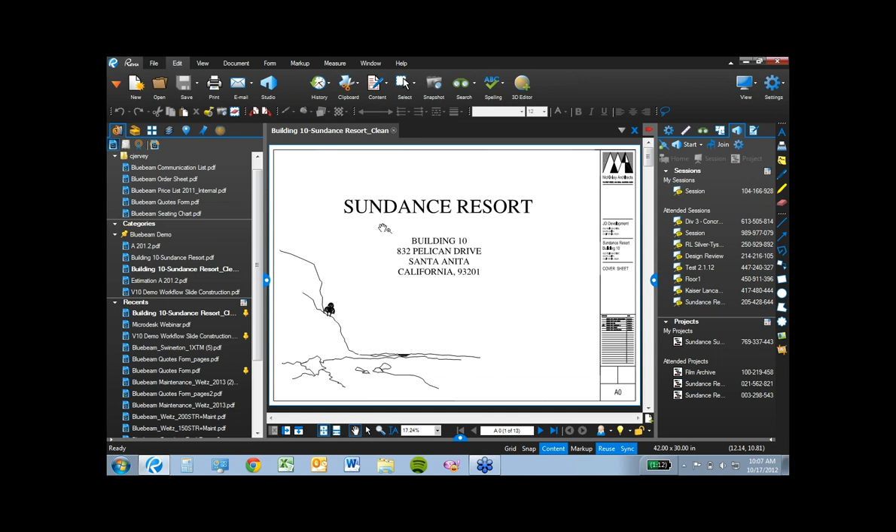So I'm going to go ahead and start by pulling up a set of plans here. You'll notice if I scroll to our page index, our drawing index, that we've already started to create some hyperlinks. We wanted to make a dynamic project document, something that's easy to navigate, that we could set up beforehand and would save lots of time throughout the course of the project.

You'll notice we've got a new Links tab in Revu 10, broken down into two areas. An area for places, which allows you to create linked destinations, so you'll notice we've already got a couple of details linked, and I'll show you how to create that in a minute. We also have a full list of all the hyperlinks in the document in our hyperlinks area, which we could search for any given link, etc.

You'll notice we've got a whole bunch of these from this particular sheet that are jumping to the pages we want them to jump to. When I actually turn on the hyperlink tool, you're going to be able to see where those areas are. So we actually started this process here.

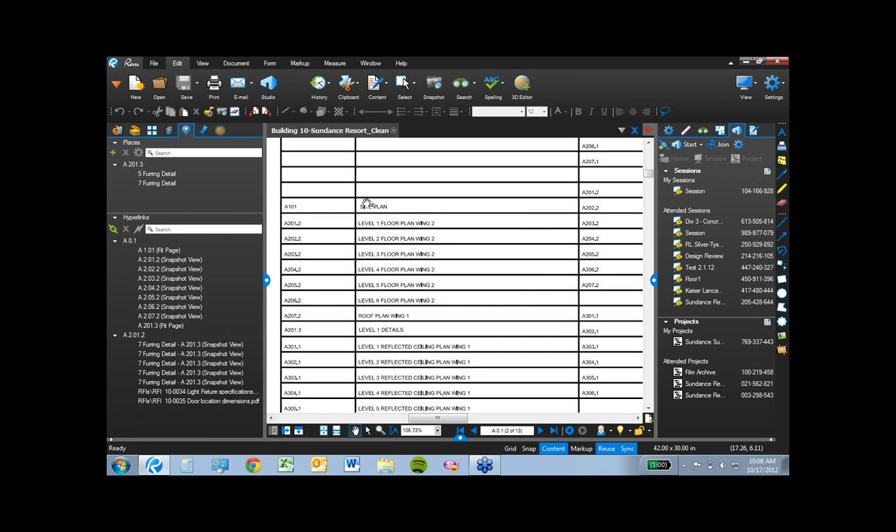So now I'm going to show you how easy it is now that this has been created. I could jump to Level 1 floor plan, and you'll notice it takes me right there. Again, this is just about making your documents much more navigable and easy to get through.

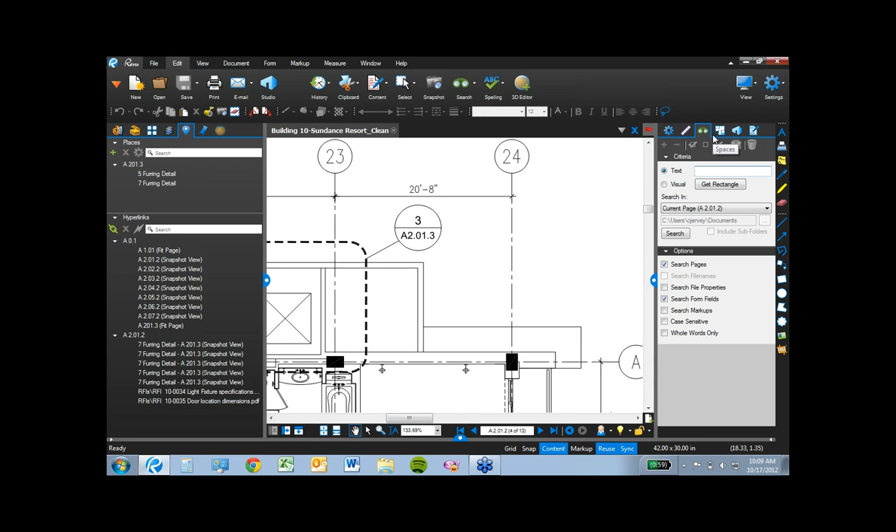But we also have a couple other tools that we've built out that can make this process even better. You'll notice we have a Search tab here in Revu. One of the new tools we have is this visual search tool. So I might also use the links tools to jump not just from a page index to a floor plan, but also from a call-out to a detail. Again, you could set all this up before your project got started to really make this process dynamic.

So once I've clicked on my Search tab, I can click on the visual search button and click on the get rectangle button, and it turns my cursor into a crosshair. I'm able to go ahead and define that space here, define the area I wanted to search. You'll notice I get a nice little preview here in my search tab.

You'll also notice I have the ability to search a variety of different areas. I can search the existing document, search this current page that I'm on, or I could go ahead and search all open documents. I could search through an entire folder — so if I've got my project broken up so each page is its own file, you could store them all in a folder and have the search run through the entire folder for that particular graphic.

In the interest of time, I'm just going to run it on this page, and I'm going to click search, and it'll run through. You can notice it's powering through here, and it found the two locations on this drawing that have that particular call-out.

So I'm going to go up to my tools here, check all, then go to my check tool, and I'm going to go ahead and hyperlink all of these results. You'll notice that when I create a brand new hyperlink, or when I hyperlink all, you get this action dialog box. The action dialog box allows me to create various different types of links.

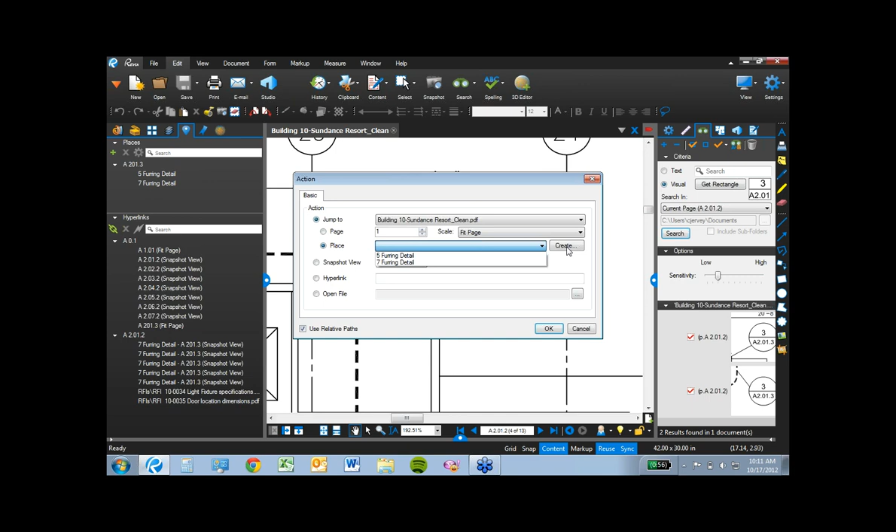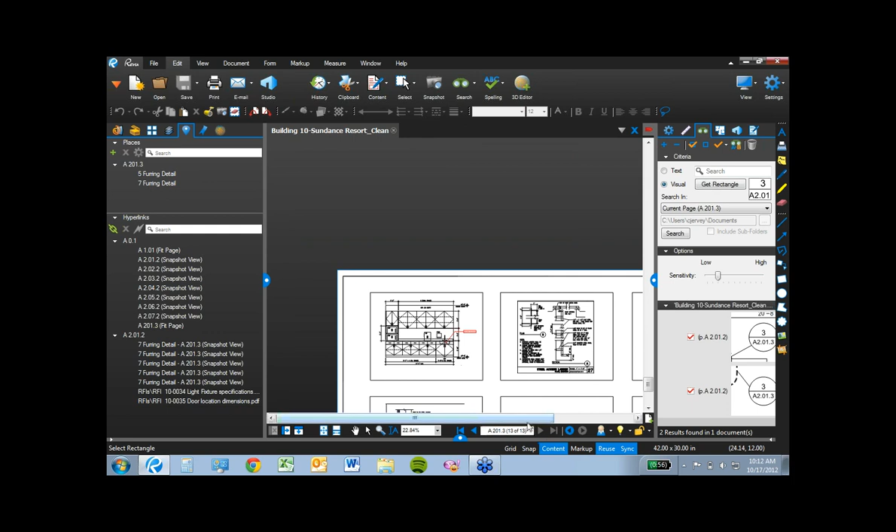You'll notice that I have the ability to name it, and in this case I'm going to say this goes to my elevator detail, because I already know that. I'm not going to jump to a page here, I'm going to do that snapshot view. I'm going to get the rectangle, and I know that this is on my last page, so I'm going to scroll out here.

I know that's my elevator detail, so I'm just going to quickly draw that around the detail. You'll see that it loads the actual location, gives me the file name and the page, etc. So now I know I've created this brand new place. When I hit OK, you'll notice that it loads in my New Places area.

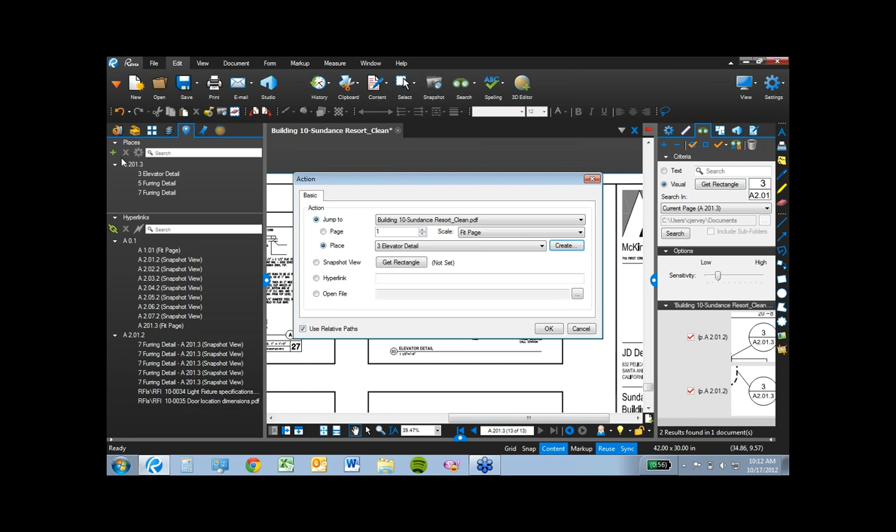If I jump back to page 4 here, which is where those original callouts were found, you'll notice that these are now hyperlinked, and when I click on them, it takes me right to the elevator detail. So again, using the hyperlinks tools, you could use them for a wide variety of different things, but one of those ways is creating easy to access project documentation where you can very quickly jump.

No longer do you have to unfold your 400 sheet set and try to find a detail on page 87 that's somewhere on a sheet of 40 different details. So that should make your life a lot easier. And again, you can use that for almost anything.

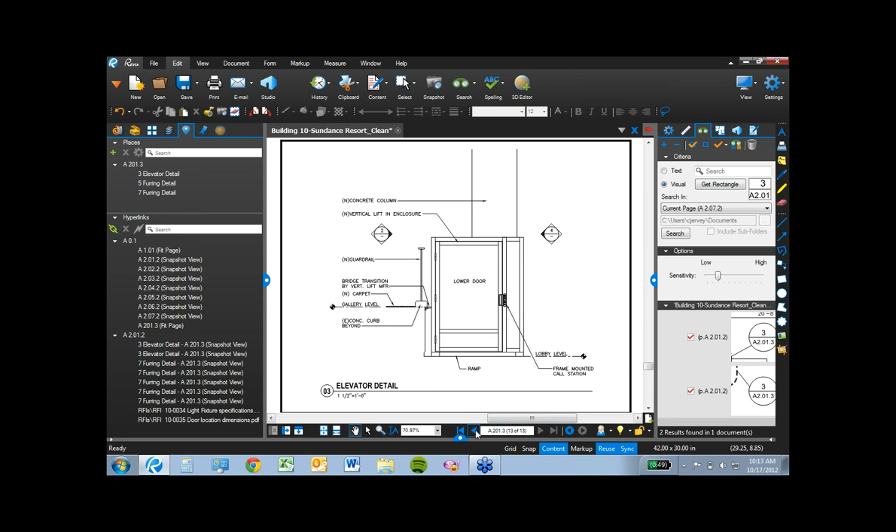If I were to jump back to page 4 again, I may actually already have some. I don't here actually, but I could, as I mentioned before, go ahead and post RFIs, link to specification sheets, whatever else I wanted to do using those hyperlink tools. So that's the new linking, and those are some of the new advances in our links tab, which has been a really useful tool now for project setup, etc.

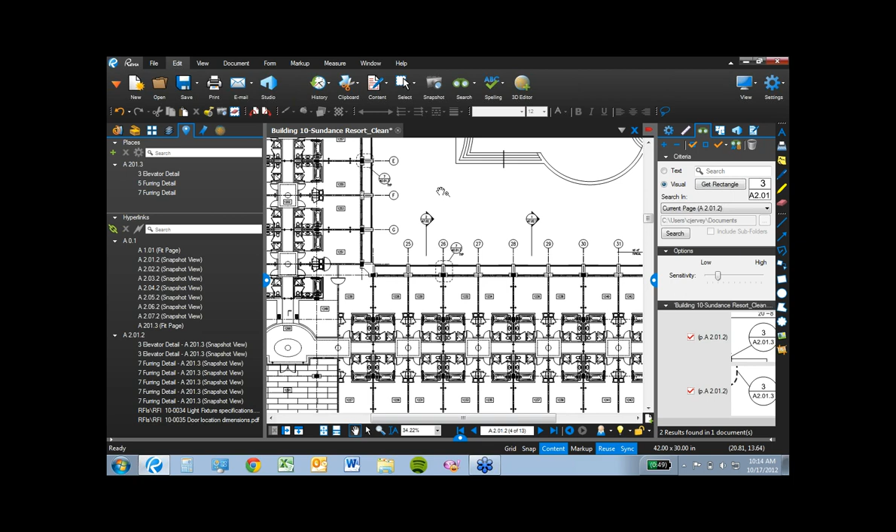Another tool that we have really built out is our layers technology. You'll notice here that we've got a layers tab as well, which is new for Revu 10. The layers tab is great for a variety of different reasons, but let me first show you how it works in conjunction with our various document comparison tools.

We've had both of these running for a little while now, but let me just jump through the two different document comparison options that we have. First is compare documents, and you'll notice here that I can access files, original and revision files, whatever I want to be able to compare. In this case, I've got them saved in a really accessible location.

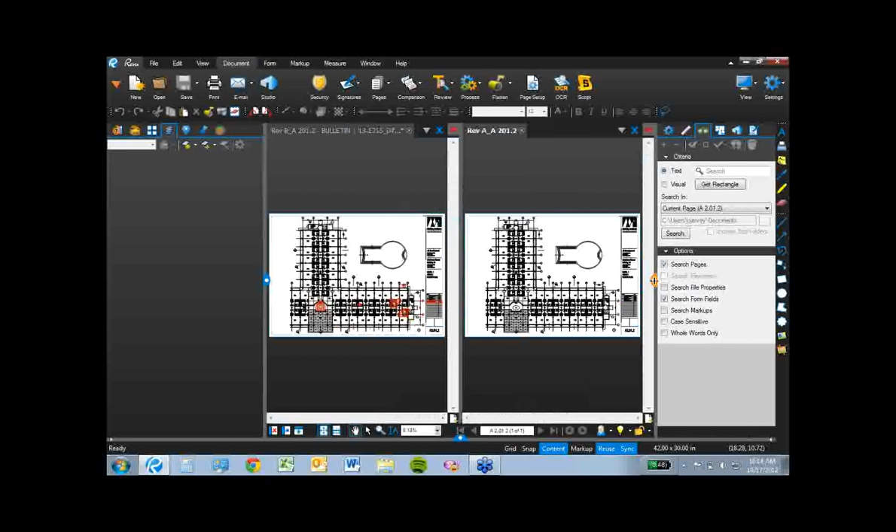Let me go ahead and pop these open. I'm not going to play around with this too much, there are some things you can do to change the way this works. But by default, what happens is Revu wants to do basically a side-by-side comparison of the two documents. You'll notice here that Revu has gone ahead and split my screen for me, which I can do at any time using my split view buttons here.

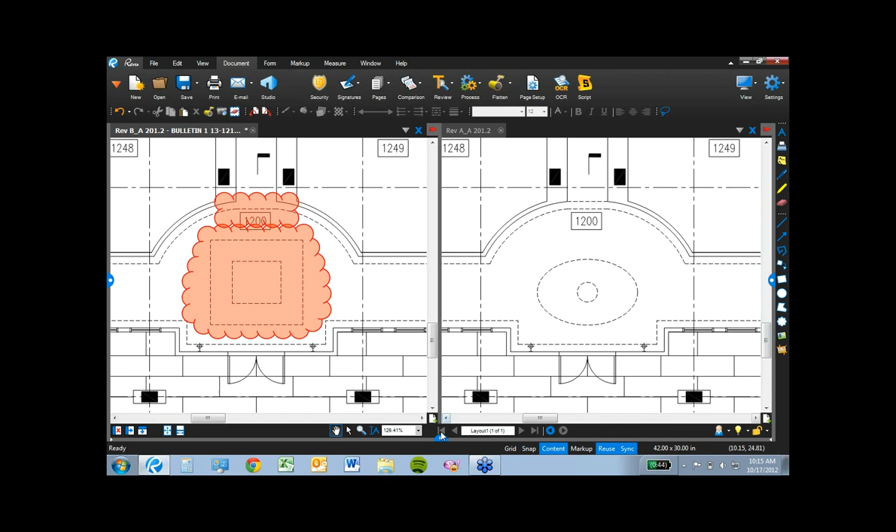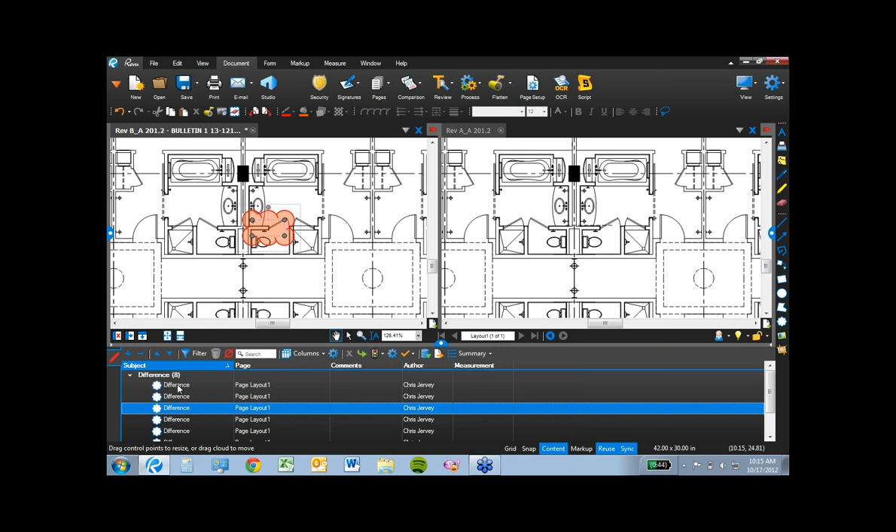It's gone ahead and turned my sync button on, which will allow me to zoom into one area on one drawing and have the same area come to me on the other drawing. It's also gone ahead and created a red cloud over any differences that it sees graphically, and assigned a subject line of difference so I can have a connection between the markup itself, the cloud, as well as the line item in the markups list. So I can very quickly scroll through this to see all the things that have changed.

So that's sort of the side-by-side comparison, a very useful tool for a quick look at a revision against an original or whatever. But the other tool that we have for document comparison is called Overlay Pages. Overlay Pages, again, has been around for a little while, but we've done something somewhat unique with this, and I wanted to show that to you.

I'm going to go ahead and select the files that I want to add. You'll notice here that what it does now is it adds layers. In the first file that you add, it's going to want to color it red, and it's not going to give it any background because it's going to be a base layer. So I'm going to hit OK, and go ahead and add another file. The second one, you'll notice by default, it turns green.

And it does give it a blend mode here, because what it wants to do is be able to lay it on top of the original base layer. Let me hit OK there.

I'm going to add one more. This third bulletin here, and again this would turn blue. It goes up to, I think, 8 different colors throughout the process. But basically, you should be getting the drift here. It's going to colorize these.

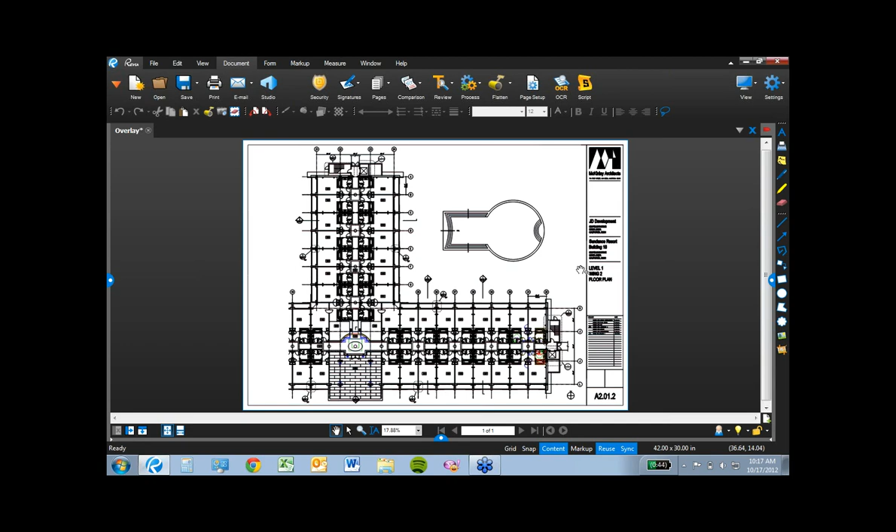What's neat is when I hit OK, it's going to go ahead and lay those three files on top of one another. Any of the lines that are shared and haven't changed are going to darken, but any lines that are new or have been removed are going to be visible because they're colorized.

So you'll notice here I can scroll into this area and take a look at all the original red drawings. They were here, and it looks like they were removed at some point. Looks like they made one revision - they made them ADA compliant and added some junior suites. So you can sort of see the history of this particular drawing.

And when I pop this out and turn on my Layers tab, you're going to see that I have the ability to control these layers. This overlay pages feature is really run by our new layers technology, and we've really buffed it out.

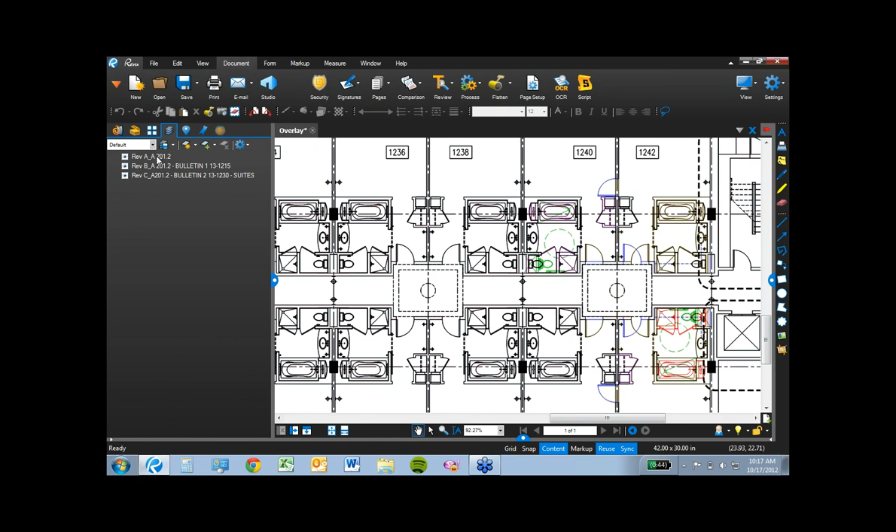So now if I want to go back to my original file, I can see it that way. I can compare revision A to revision C, or revision B to revision C, simply by toggling the layers on and off. I have full control over that.

I can also go ahead and add layers from files or from pages directly within my Layers tab. So if I wanted to continue to build out maybe a historical record set, or slowly build my as-builts, I could use that tool for that as well. That's kind of a cool way to do that.

I can obviously delete layers, and I can add parent and children layers. So there's all sorts of stuff you can do here. You don't have to colorize the layers - there are many different things you can do to control this.

But again, it's a really nice way to be able to see all of the changes that are happening on a drawing throughout the entire project. So I wanted to bring that to your attention. It's a really handy tool and is really new for us.

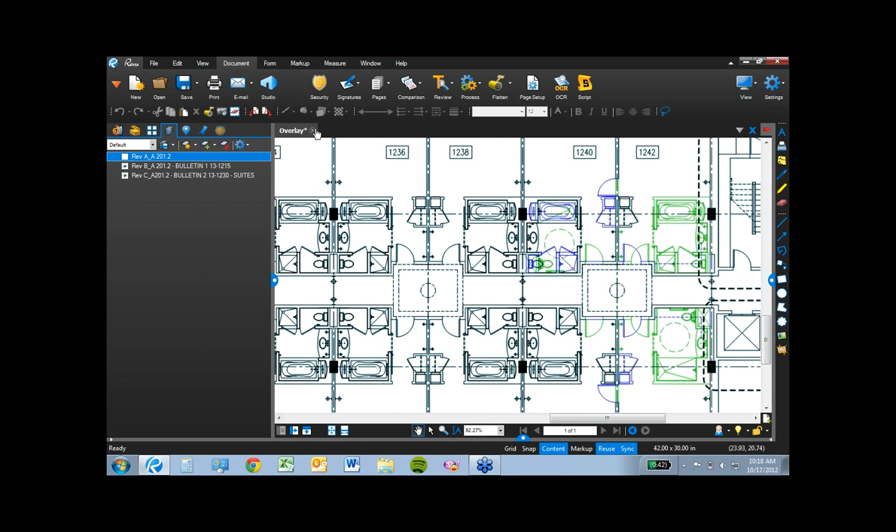So what else did we want to talk about? We wanted to also talk about spaces. Spaces are a really cool tool, because one of the things we heard most from our customers - let me go ahead and just pop open a file here - was that they wanted to be able to create pre-existing zones or areas that would automatically capture any markups placed within those zones.

We had lots of folks that were, for instance, doing a punch on a hospital or a larger building, and each floor was broken down into 5 or 6 areas - zone A, zone B, zone C. They wanted to punch it by zone, and they wanted to be able to put any of those punch tools and have them automatically work by area or by room.

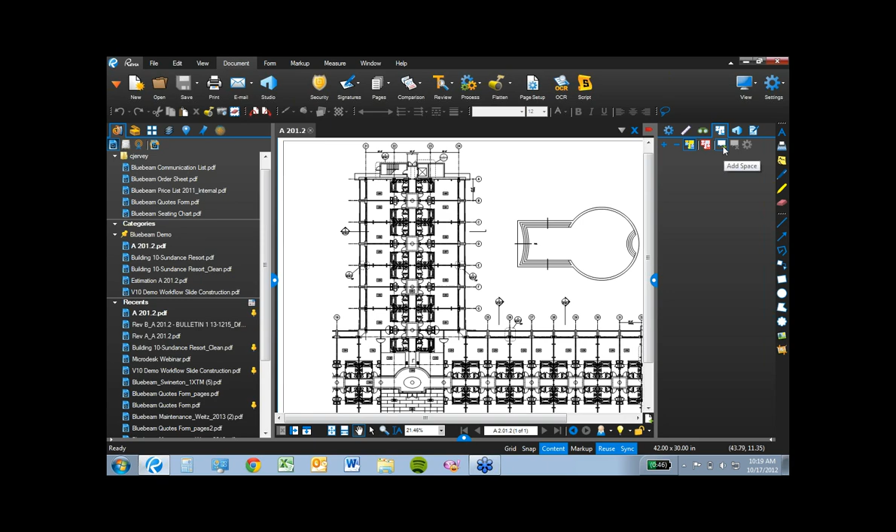So we created this new Spaces tool, and you'll notice here that once again we've got a Spaces tab, and I can go ahead in here and add spaces. So if I just click on this space, you'll notice my cursor turns into crosshairs, and I can simply click and drag. We'll just say this is going to be zone A here. And now I'm going to go ahead and choose this to be zone B.

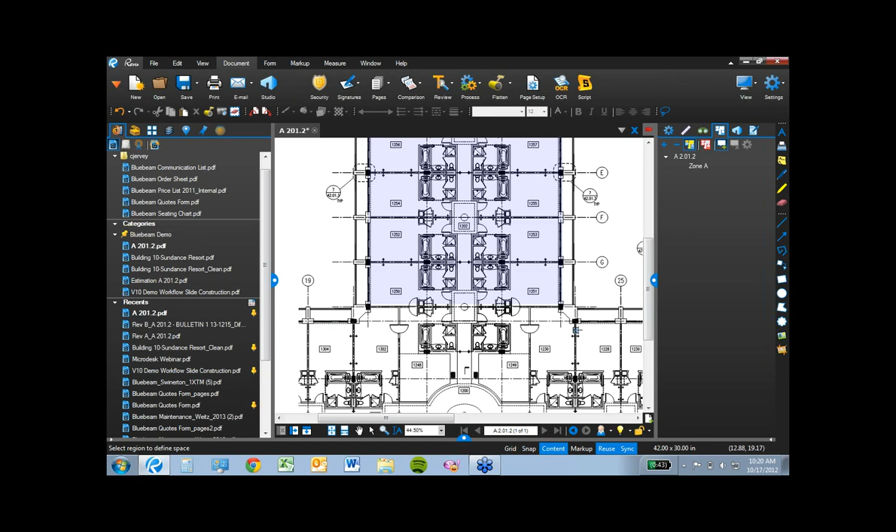Now, actually, I'm going to pop into my punch profile that brings up all of my punch tools, which is handy. Let's just say I've got some painting touch-ups that I want to put in here, and I've got a bubble on the surface right above that tub. I don't need to go through this whole process here, but I just wanted to show how this works.

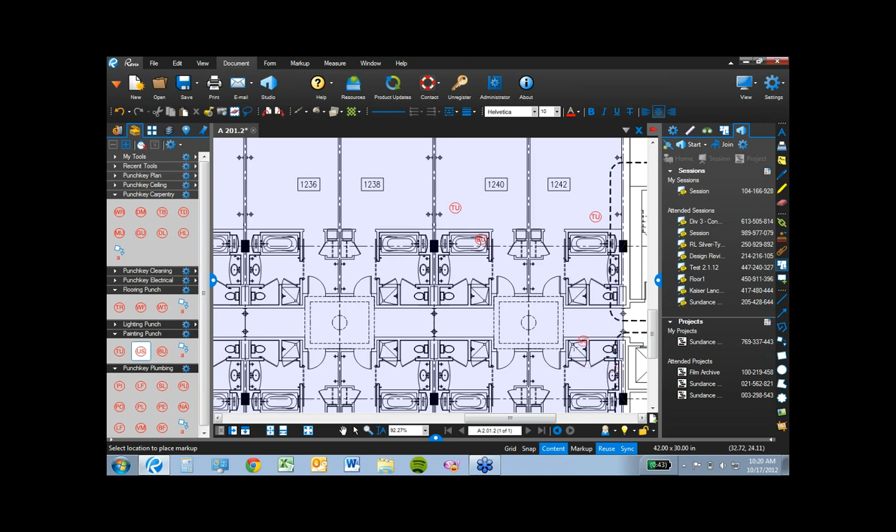If we go over here and pop open my markups list, what you're going to see is not only do I have the information I assign to the markup itself - which tells me what the actual comment is regarding the punch item, who placed it, what the status is, etc. - but it also gives me the zone that it falls into. So these were all placed in zone B. What I could also do is create subzones.

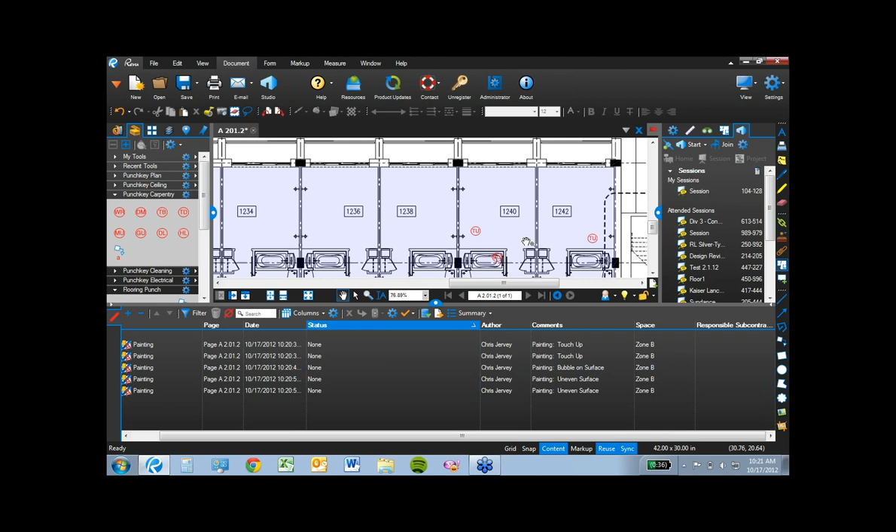If I wanted to start labeling the room numbers, I could do that before we started the punch, during, or after. I could go back to my Spaces tab, add another space, and do a quick one - forgive me if these aren't particularly well done - I'm going to call this 1240 because this is the room number. You'll notice it automatically populates room 1240.

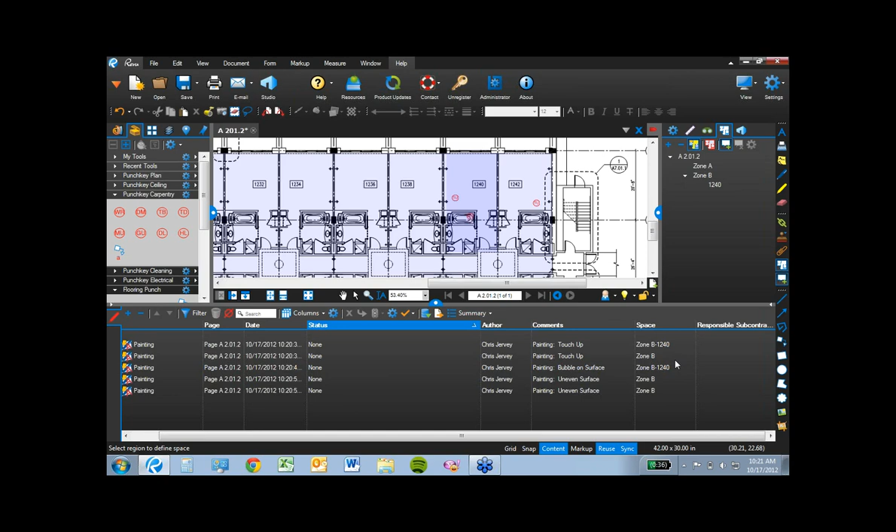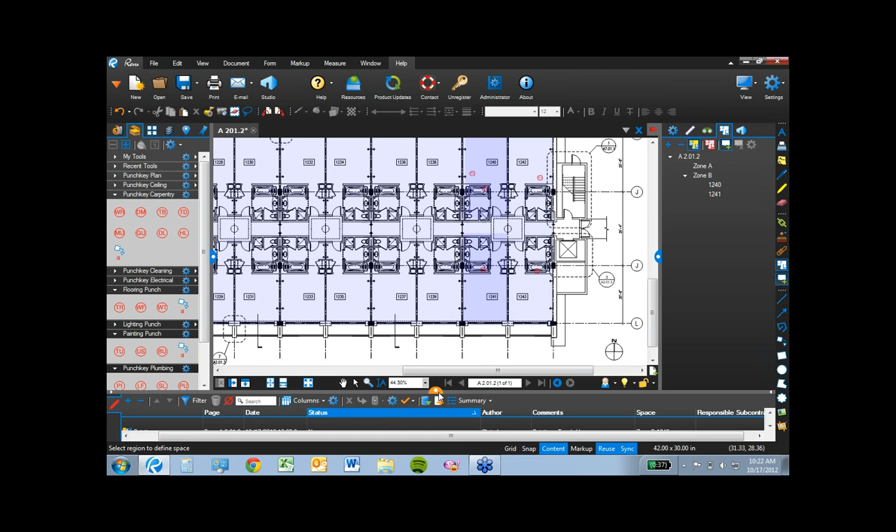If I go in order and do my next space as 1241, you'll notice that it automatically populates that next number in the sequence. So you could very quickly walk through that process, and it's going to start to give you even more specific information.

This has been really handy for things like punch. A lot of our estimators like to use it so they can break down their estimates or takeoffs by zone or region. That's another thing that's new to Revu that's been seeing a lot of really positive feedback.

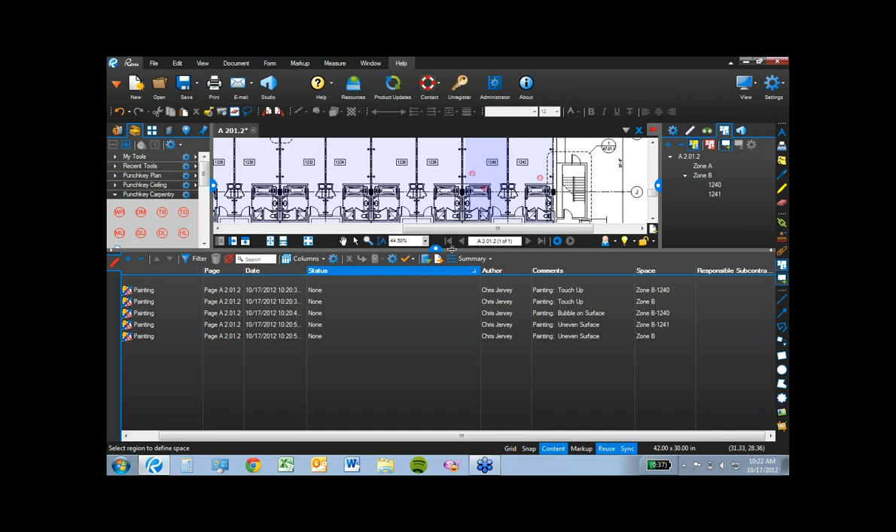Okay, so the next thing I want to jump into is our 3D tools. I assume these are probably the most popular new tools because they're really brand new to the industry as a whole. We've had the ability to create 3D PDFs, and the ability to view and manipulate those 3D PDFs, but you've never been able to do it directly from some of these native programs, bring them right into a PDF environment, and then mark them up. So that's really new for us.

As always, let me jump back to my construction profile. You'll see here I have a 3D model tree tab. There are a couple of different ways you can create 3D PDFs. The first would be to use our plugins to actually create a 3D PDF, and that 3D PDF is going to take up the entire page. The other way is to start a brand new blank drawing, and rather than create a 3D PDF, actually create a U3D file.

So I'm just going to open up a brand new document. What happens when you create a U3D file is that it gets saved to a clipboard, and then you can pull it into a portion of your brand new file. So if I pop back over to my edit menu and click on 3D editor...

When I click on it, it's going to turn this cursor into a crosshair, and I have the ability to pop this in. Let's say I want to bring this in for half the page, because I wanted to make a note on the bottom part or whatever. If I go to my clipboard or an area where I've saved my U3D, in this case I've got this U3D waiting for me, I can go ahead and click on that file. I can then do a few different things here, change the background, the lighting scheme, etc.

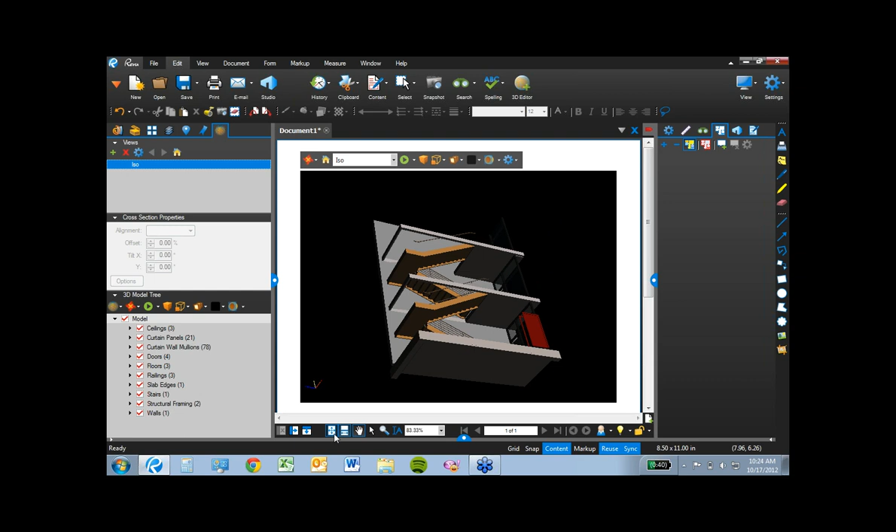I'm just going to use the default properties for right now. When I click OK, you'll notice that it actually populates that window with a 3D, which is great, because if I wanted to go ahead and add a text box or some notes down here, I still have some room on the file to work with, which is really handy. But let's just focus on this right now.

So in Revu 9, we gave users the ability to start to view and manipulate 3Ds, but we didn't have the ability to actually mark it up. This is where it starts to get really cool. I'm still convinced our developers just used magic for this - I don't know how else they would have done it.

You'll notice you would approach marking up a 3D PDF in the same way you would approach marking up a 2D PDF. You'd grab one of your base markup tools or any one of the tools in your tool sets, and you could go ahead and click on the area you wanted to mark up. Maybe I want to grab a callout here - maybe this is an RFI - and I just want to ask how far beyond the landing do these railings extend.

So I've gone ahead and made this markup here. I can change this around just like I would, and of course I could change the properties on this if I wanted to. But you'll notice here that as I start to make a markup, I get this little light blue X here, and when I click on this, it creates a markup indicator for me.

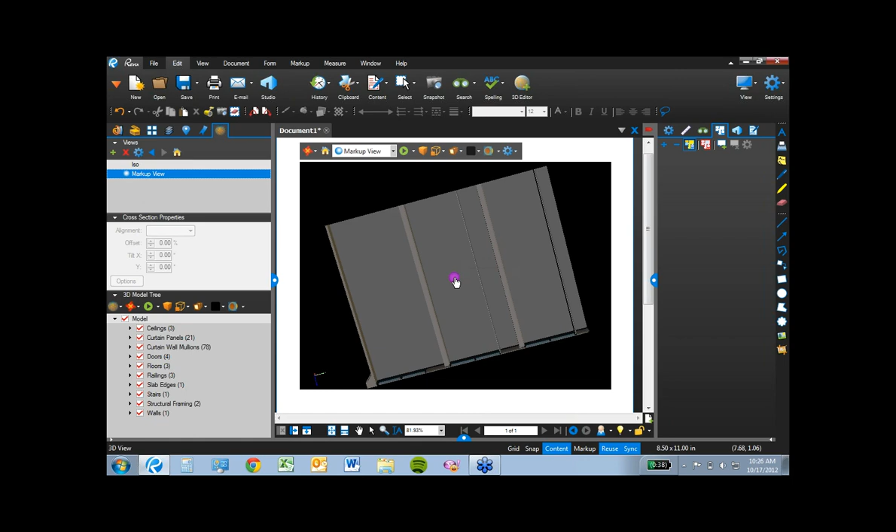So now I know, no matter where I am in the model, even if I flip it all the way around, that there's a markup here, this little markup indicator is indicating that there's a markup. So when I click on it, it pulls me right back to that exact same view that I was at when I created the markup. Which is awesome.

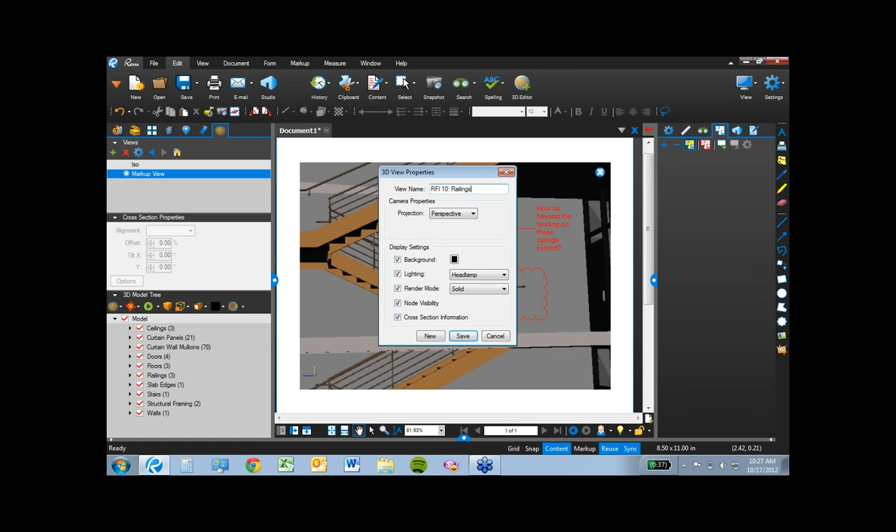But it might get confusing if you've got 50 markups and 50 markup indicators. So popping back over to the 3D model tree, you'll notice I have a list of the various views I've got. So I might want to right-click and edit this so I can have nomenclature that better signifies what that particular markup refers to. So this might be RFI 10, railings, something like that. I hit OK, and that now changes to something that's a bit more significant or easy to understand.

And again, you could create a whole variety of different views, jumping back and forth to see all the various markups or all the various views that you might have there that would or would not contain markups.

You'll notice here that in the 3D model tree, you're going to be able to pull all sorts of information directly from those native programs. You're going to have control over elements, turning them on and off. You have the ability to actually dissect the models in 3 different axes - the X, Y, and Z are all controllable depending on the model you're working with.

So it's really a whole new ball of wax here at Bluebeam Revu. We're really expecting that people are going to want to use 3D PDFs, not just referentially, but to also actively engage in marking them up, and Revu 10 now gives users the ability to do that.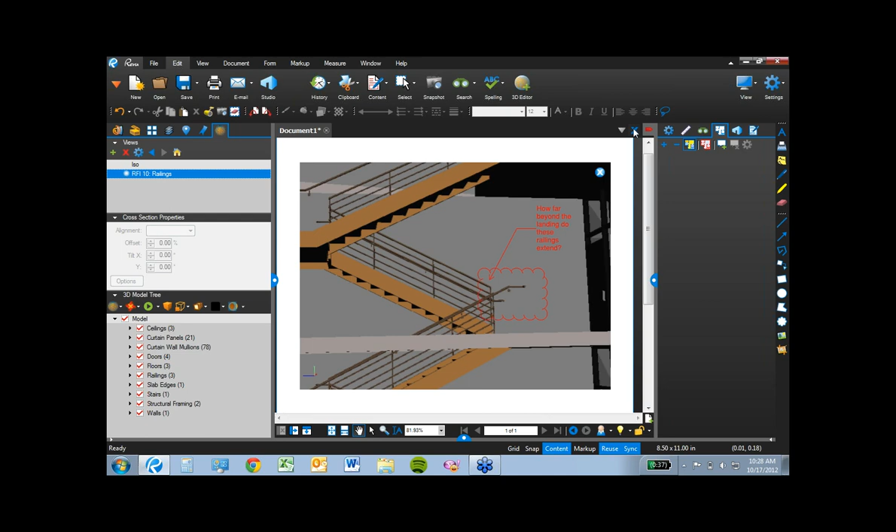And the last thing I wanted to cover, and we're almost at 10:30 here, is Bluebeam Studio. Again, kind of like 3D PDFs, it's not that it's brand new, it's just that it's been expanded now to really include some much more dynamic tools.

So I wanted to show you again how easy it is to create both a Bluebeam Studio project and a Bluebeam Studio session. For those of you not familiar, Bluebeam Studio is our cloud-based collaboration tool. It allows for 2 different things. Studio Projects allows users to store project files, and those files can be PDFs, but they can also be Excel spreadsheets, Word documents, native CAD drawings. You can store any types of files that you want in Bluebeam Studio Projects.

Obviously, the only files that would open in Revu would be PDFs, but you can store those documents there and access them from directly within Revu. There's also a sort of light document management component to it that allows you to check out and check in files.

So you'll notice here I've got one of my projects set up here. When I click on it, the interface changes a little bit here. I have a whole bunch of submittals going on for this particular project, and I've got a Microsoft Excel spreadsheet here that I could click on. I also have this submittal index, and when I open it up, you'll notice it has a lock on it. If I click on this, I have the ability to check this file out so that it's protected, so nobody else can be working on that file.

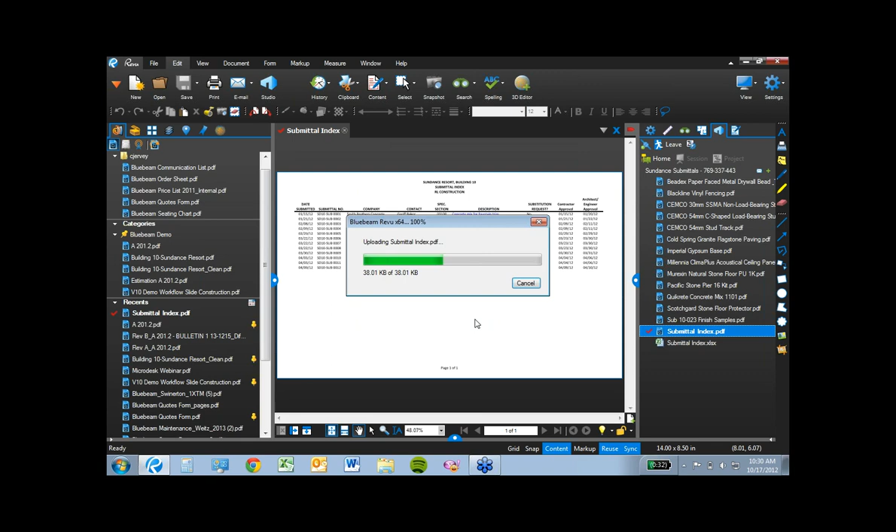But again, it becomes part of your Studio Project folder where other users then can access that from wherever they are. So it's really an opportunity to have multiple remote project participants all accessing the same files, all participating in markup sessions from wherever they are, whether they're in an office next door to yours or if they're in China working as a consultant. You still have the ability to very quickly pull those over.

Another neat thing about Bluebeam Studio Projects is that I can very quickly right-click on any of these files and add them to a brand new session. So let's just say I wanted to go ahead and start a brand new session called Submittals Review.

You'll notice here that I can go ahead and create a new session on the fly from directly within Studio Projects. You'll notice that it takes me right over to my Bluebeam Studio Sessions interface, and I can very quickly add attendees.

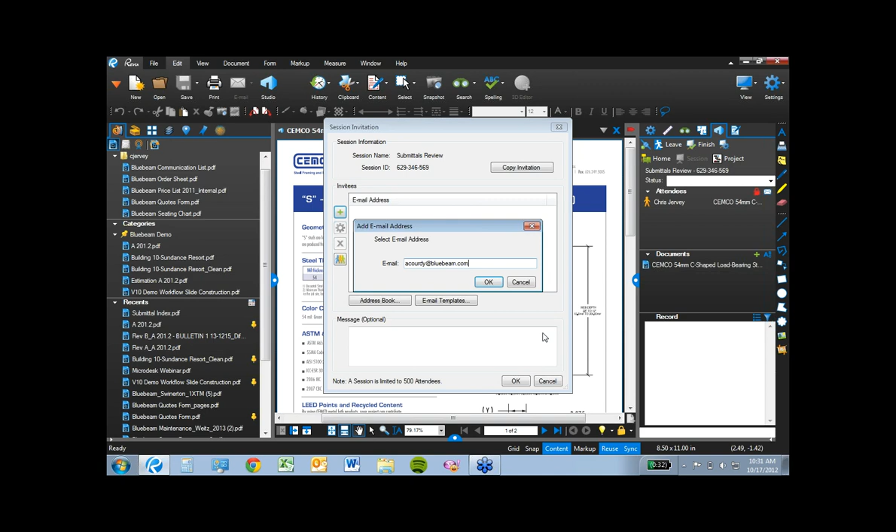So I'm going to go ahead and add a colleague of mine right now to have him participate in this. And I'm going to go ahead and hit OK. It's going to deliver an invitation to him, and once he gets it, he'll be able to join the session from directly within his Outlook. It got to him quickly, and you'll notice he just joined us.

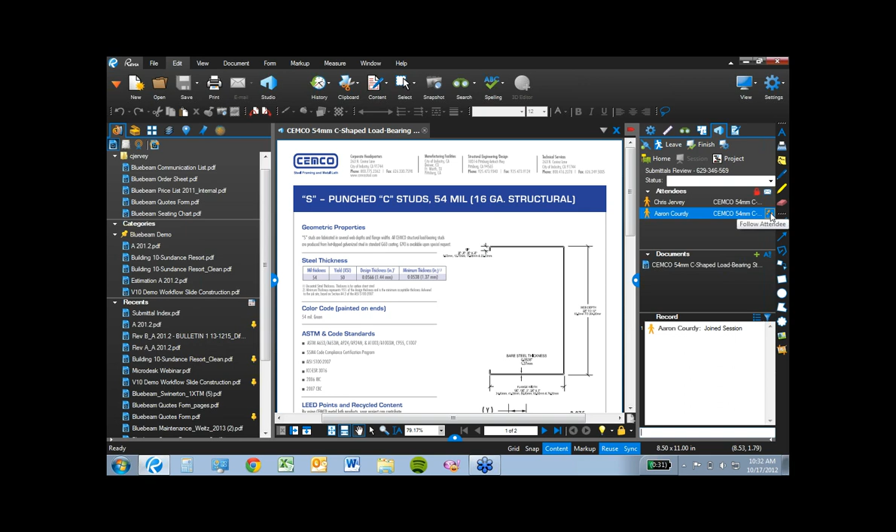A couple of really cool things with Bluebeam Studio Sessions. I can actually hover over his attendee name in the attendee list, and you'll notice there are some footprints here. So if I want to click on those footprints, I can then watch what Aaron's doing. It changes my cursor to, well, I'm not really sure how I would describe that. It looks like a sunflower.

But I'm not doing anything right now, I'm just completely following Aaron. I know what documents are in the session, and I know who's attending the session. I could also go ahead and change my status to reviewing if I wanted to.

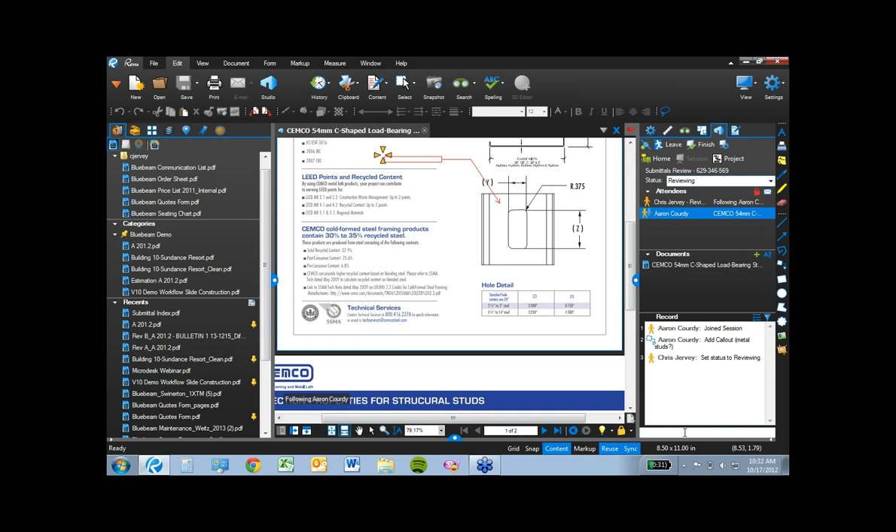You'll notice here I can even add chats. Aaron, when can we expect this to be finalized? And you'll notice it even has a chat field here.

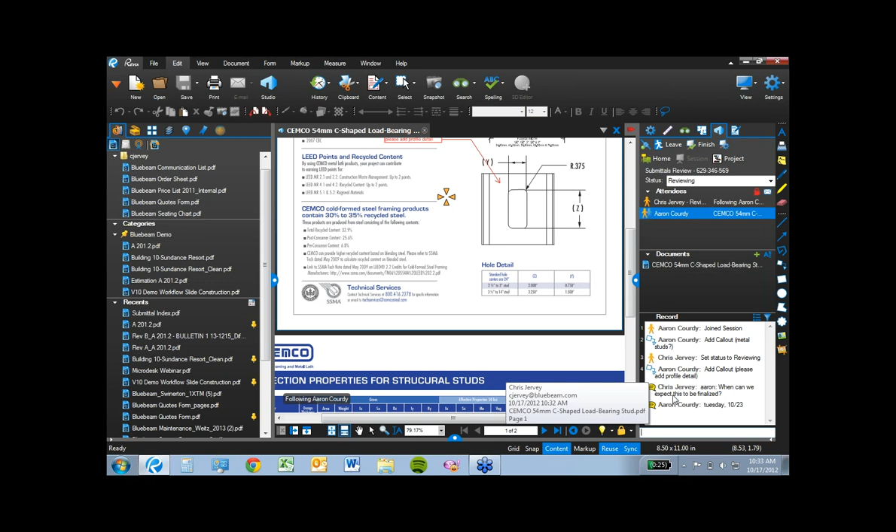So working together in real time, whether you're in the same building or across the world, is now totally available, and it's saving our customers a ton of time, whether it's for shop drawing reviews, submittals, RFIs, or punch lists. The ability to get all the work done in a nonlinear fashion is saving tons of time for those users.

That's the last thing that I wanted to show you. I know that we're a little bit long already, so I hope that that's okay. But I think that kind of sums up where we're at right now with Bluebeam Revu 10 and some of the great new features we've got in there. I think it makes sense to just open it up now to Q&A.

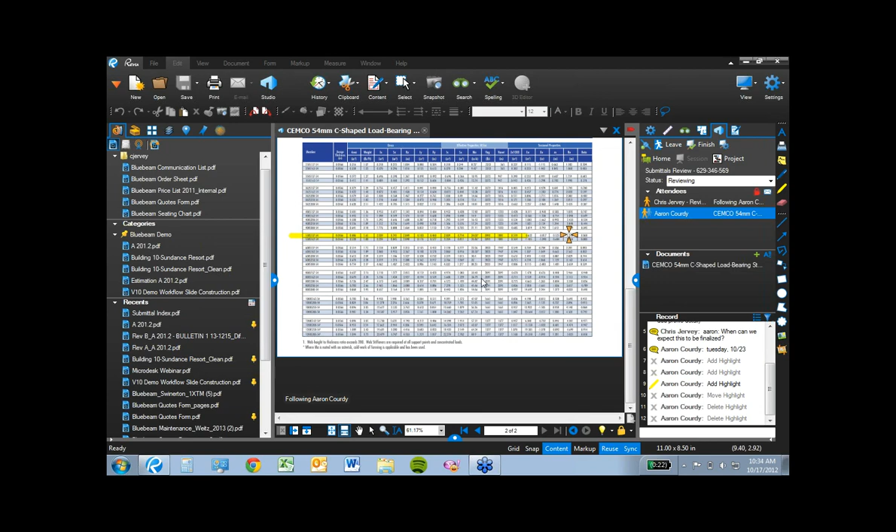Let me hand you over to the presenter. Okay, all right, there you go. Thank you, Chris. Of course.